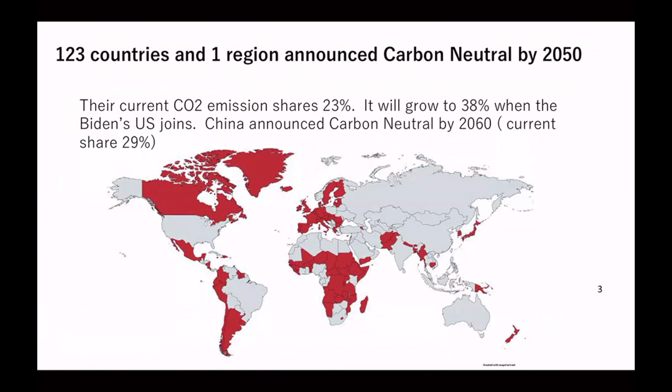One reason is COVID-19 accelerated the transformation. There are 123 more countries now announcing carbon neutrality by 2050. And renewables are getting very cheap, especially solar and wind, and they are the new king of electricity.

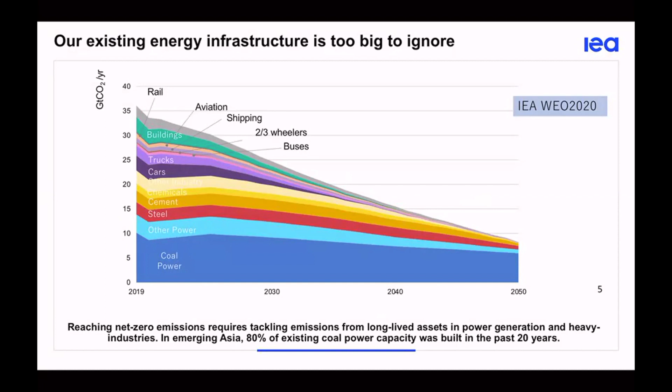But the problem is not solved by renewables alone. The existing energy infrastructure is too big to ignore - coal, steel, cement, and heavy trucks - and many of them take a long time to deplete. The issue is for emerging Asia: developing economies need this infrastructure for economic growth. How to decarbonize these very hard to abate sectors?

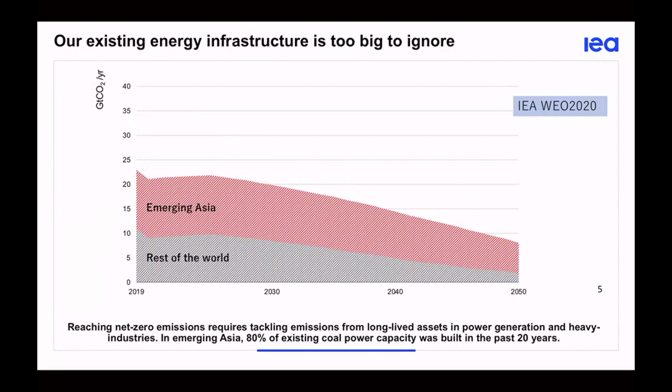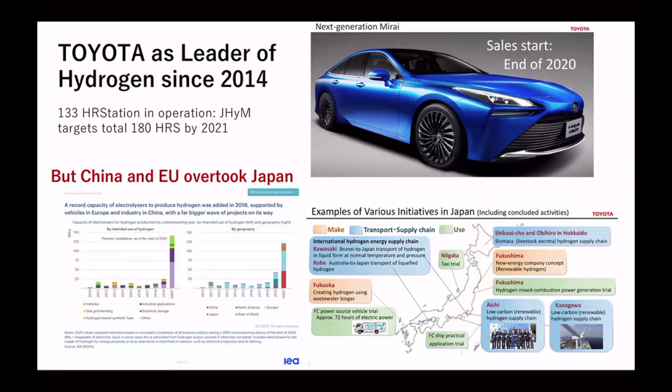Japan started with fuel cell motor vehicles like the Mirai since 2014, but we focused too much on mobility, and China and the EU overtook us. After Prime Minister Suga's announcement of carbon neutrality last year, Japan has been changing very dramatically toward that direction, and METI announced a green growth strategy, and hydrogen is everywhere.

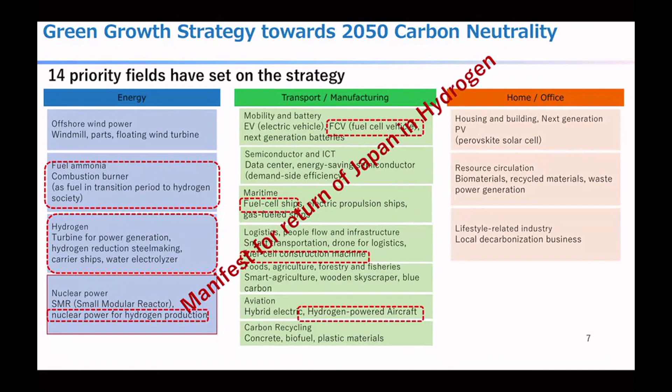Small modular reactors, but also nuclear, can be used to generate hydrogen. I think this is a manifesto for Japan returning to hydrogen leadership. Trading hydrogen is another important element - Japan started LNG, liquid natural gas, trading 50 years ago, but now we must move toward trading hydrogen, either as ammonia, liquefied hydrogen, or organic hydrate.

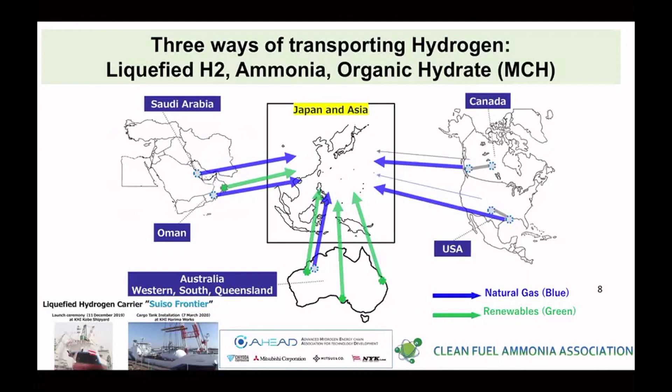ICEF, created in 2014 by former Prime Minister Abe, is an international forum for promoting innovation for sustainability. IEA, in its sustainable recovery plan, identified 4 major necessary technologies: hydrogen, batteries, CCUS, and small modular reactors. ICEF cannot agree more, and for nuclear power, the important thing is flexibility.

Jill Engel-Cox came to ICEF and presented a case. After Fukushima, to recover public concern and support for nuclear power, we need passive safety, we need a solution for high-level waste, and easy collaboration with renewables in a very much decentralized manner.

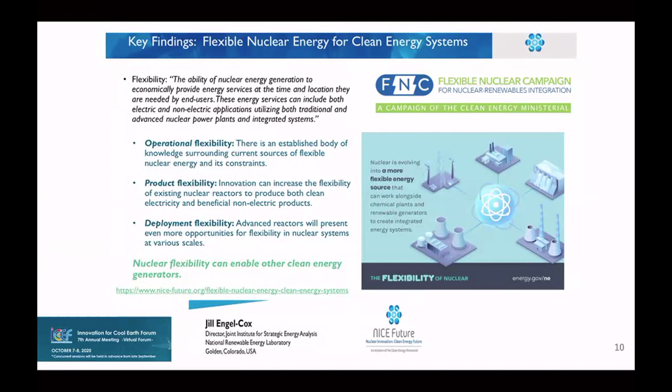Last but not least, an important issue is gender balance. I think women are much more friendly to the environment, and companies with heavier women's board representation have better decisions and performance on climate change. So the final message from ICEF last year was that there are important technologies like battery, hydrogen, SMR, CCUS, carbon recycling, but the major players should be women to reach beyond zero emission reduction toward 2050.

Thank you for my opportunity to make a presentation about ICEF.

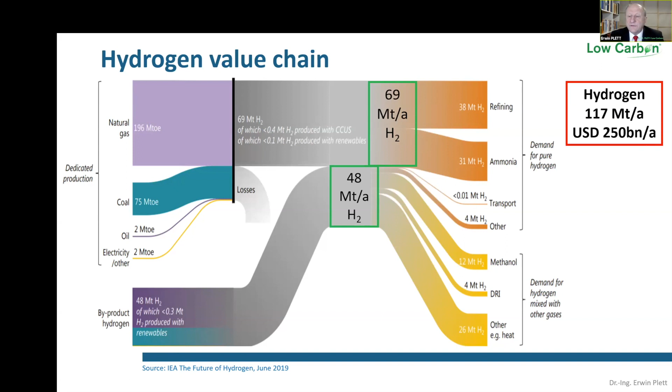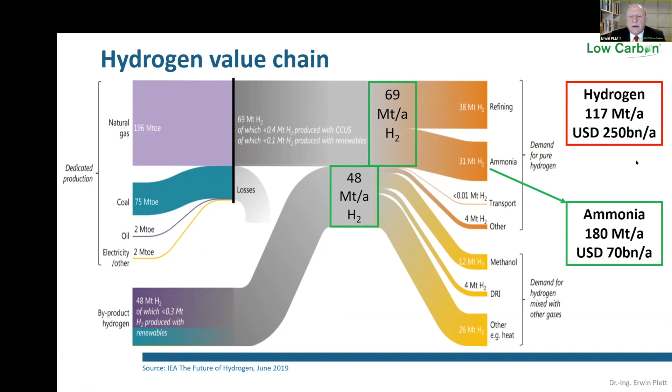One part of this hydrogen is used to produce ammonia, and that is a key element for decarbonizing, for instance, shipping. We take about 31 million tons of hydrogen and produce about 180 million tons of ammonia - that's about 500,000 a day, just to have an order of magnitude.

What about the prices in hydrogen? I borrowed this from BloombergNEF, and you see that depending on our gray hydrogen that we're producing, we could have carbon capture, and those are about 50 or 60 cents on top of the price. Now, what we want to do in Chile - we do have the resources to have very cheap hydrogen, and we are aiming for $1.50 a kilogram. That is our aim, because we do have the natural resources for that.

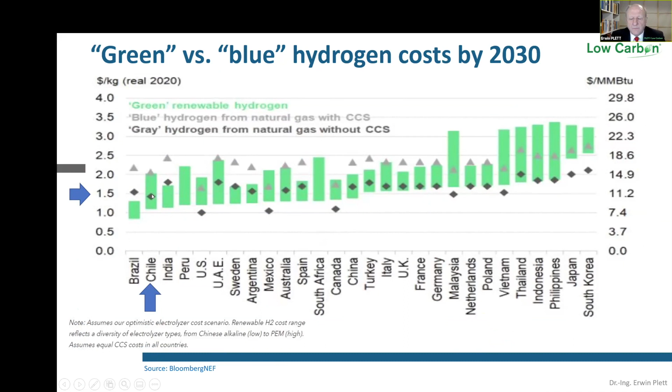Chile is blessed by a lot of sun. Just to remind the audience, our sun, which is a nuclear fusion reactor 150 million kilometers away, gives us about 10,000 times the energy we need in the whole world, for free. So we have a lot of sun, and wind, which is also a consequence of that.

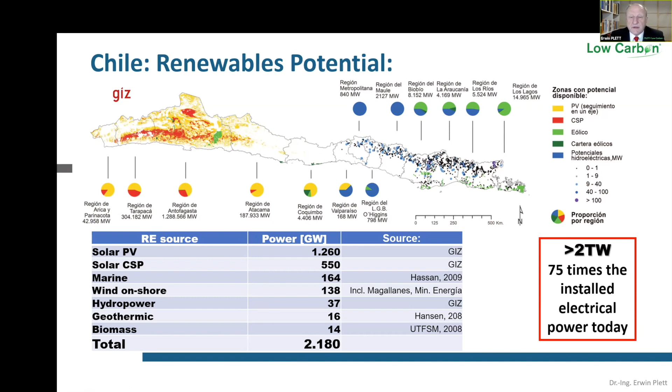So how much can we harvest? In Chile, we have solar PV and solar concentration plants, and our potential in renewables is about 2 terawatts. That's a lot. Just to remind you, the whole world uses about 16 terawatts of constant power. So this is 75 times the installed electric capacity in Chile. We have a lot to share with the world.

In 2017, there was a nice article from the Washington Post. They were battling against a former American president who said he had the cleanest coal in the world, and said, look what Chile is doing. They said Chile could be the next solar Saudi Arabia.

We did two publications, one with Hans Kulenkampff and one in Fertilizer Focus, comparing what is coming out of Saudi Arabia today, average 2.7 billion barrels of crude. If we just burn that, we get 16 exajoules. By the way, all the energy the world needs is 500 exajoules. If we convert that to electricity, we keep about a third. So this is the amount of electricity Saudi Arabia is exporting.

If I compare that potential, the 2 terawatts, with the plant factor, which differs for different technologies, we get about 6 petawatt hours. Converted to hydrogen with today's technology, that's 200 million tons - about 3 times the hydrogen produced today in the whole world. If we burn that hydrogen, we get 22 exajoules, so we're in the order of magnitude of Saudi Arabia.

But if we make electricity with today's fuel cells, at 55% efficiency, we will double the amount of electricity coming out of Saudi Arabia. If we convert this to ammonia, we could produce about 1,100 million tons. Just to remind you, today we produce 180 million tons worldwide. So this is six-fold the amount of ammonia coming out of all plants in the world.

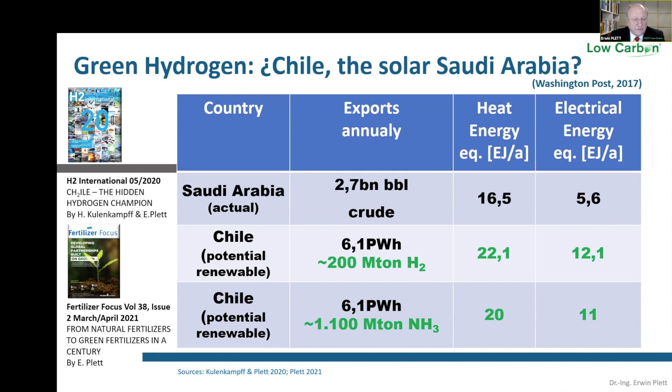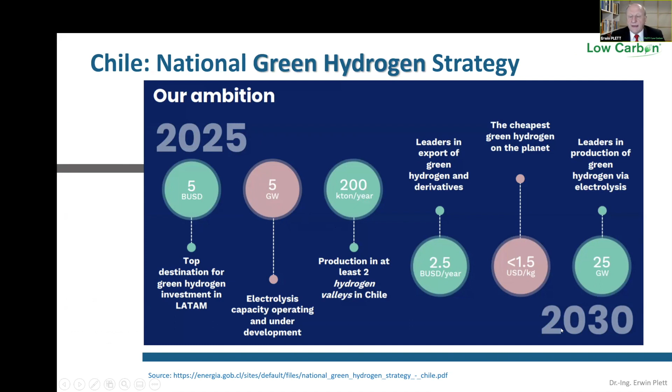In the National Green Hydrogen Strategy, our ambition is to have 5 gigawatts installed in 5 years, and in 10 years we want to go to 25 gigawatts. This is quite a lot. We want to be the cheapest hydrogen on the planet just by using our solar resources.

I would like, in this short presentation, to just thank you for visiting us. We are very proud to have you here discussing this decarbonization of these hard-to-abate sectors. Thank you very much, Dr. Plett.

That was great. It's great to see that Chile is blessed with such remarkable abundance of solar and wind. And obviously there are many countries who don't have these, so what are the other alternatives out there? On that note, I would like to introduce Seth Grae. Seth is the president and CEO of the Lightbridge Corporation. Seth, the floor is yours.

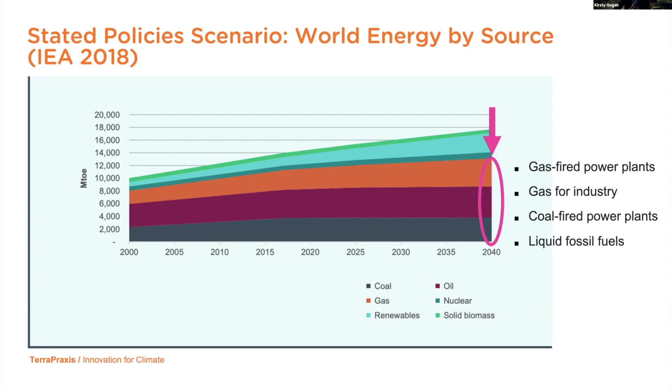And what we're really looking at here actually is a 3 to 4 degree warming trajectory, really far from the 1.5 to 2 degree Paris goals. So if we are to achieve those 1.5 to 2 degree Paris goals, this chart really illustrates just how much we have to do: a very steep emissions reduction curve to mid-century within incredibly challenging timescales, 29 years to 2050.

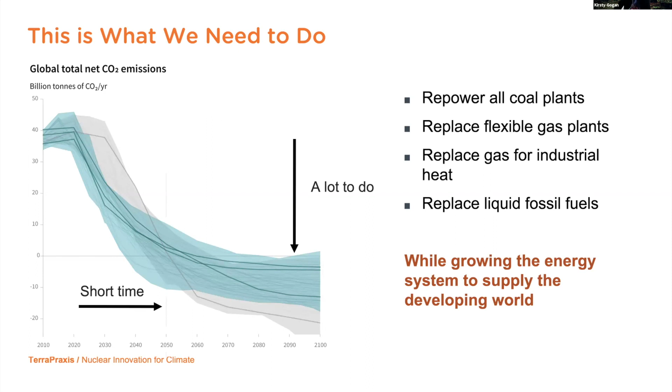And then beyond that, we need hundreds of gigawatts more energy production in order to extract carbon from the atmosphere in the second half of this century, all whilst growing the energy system to supply the developing world.

So given this challenging scale and timescales, our hypothesis is that we need drop-in substitutes that are really comparable in terms of cost and performance to replace fossil fuels, that enable us to repurpose as much as possible our existing storage, transport, and end-use infrastructure without emissions, whilst also leveraging existing skills and supply chain to achieve this cost and scale of the transition that is needed.

So just like an Impossible Burger, in fact, which is a highly scalable plant-based meat substitute that doesn't depend on behavior change, nor on people being willing to pay more.

So let's look at some impossible burgers for decarbonizing the hard-to-abate sectors, and in particular looking at liquid fuels. So drop-in substitutes like ammonia or synthetic hydrocarbons should be comparable, first of all, to the oil prices that we're used to paying today. And hydrogen is a really key ingredient in the production of those synthetic fuels.

So the clean hydrogen also needs to be really, really cheap. In fact, less than $1.50 for ammonia production and less than $1 for synthetic hydrocarbons if we're to be within the range of oil prices that we're used to paying today.

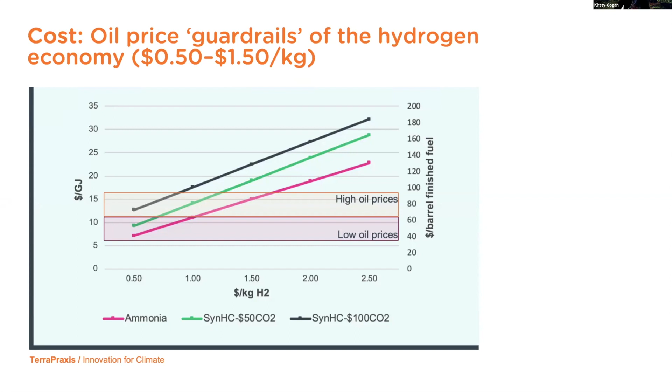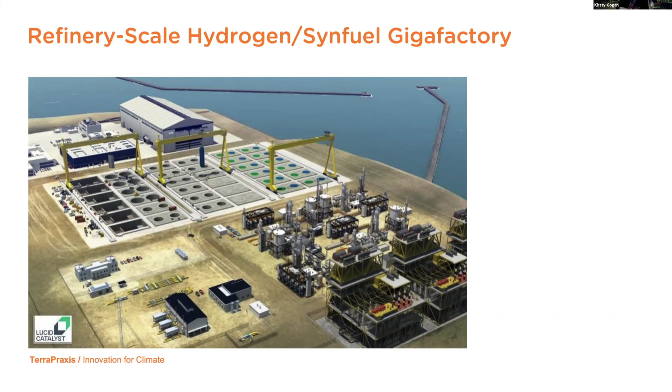Now, it's possible to achieve these really low costs with high temperature heat sources delivered in a refinery scale hydrogen and synthetic fuels gigafactory, like you see here today. This is a fully integrated installation, manufacturing and production facility, hosting 36 high temperature heat sources manufactured in the grey sheds at the back of the facility, installed and producing hydrogen for less than $1 a kilogram.

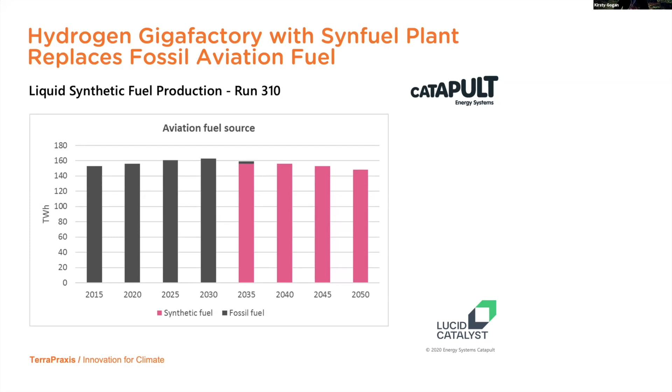We modeled the hydrogen gigafactory into the UK's Energy Systems Catapult energy system model. You can see here the effect when you can supply carbon neutral synthetic fuels at the same price, or potentially even lower than the fossil fuel version today - a really rapid switch.

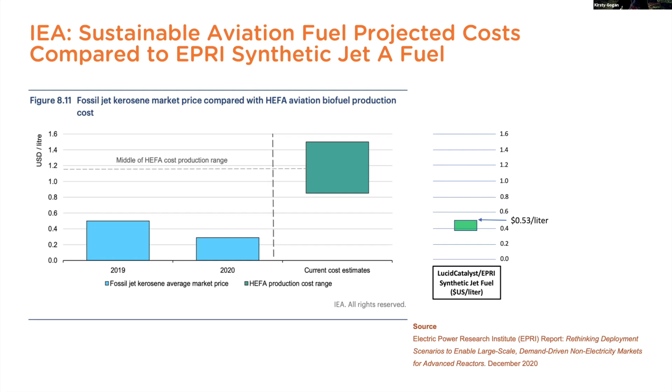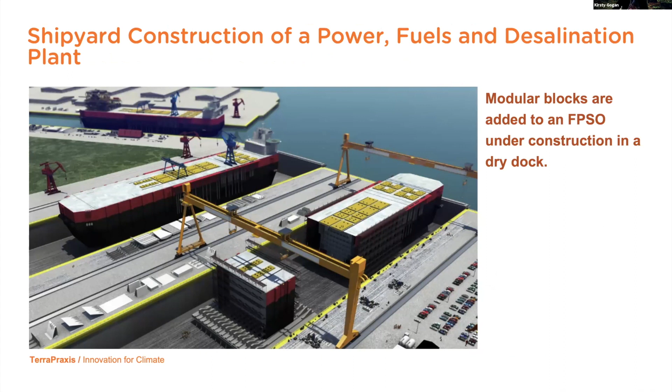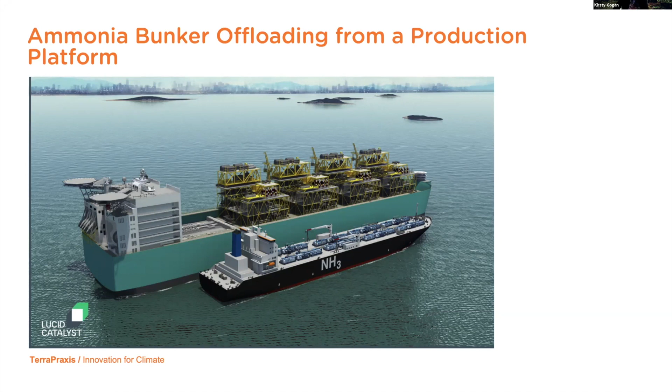In fact, world-class shipyards already work very closely with the oil and gas sectors to produce large offshore production facilities, such as you can see here, in this case using high temperature heat sources to produce hydrogen and ammonia for the shipping industry. So this is really leveraging world-class existing shipyard manufacturing capability, as well as oil and gas production, storage, distribution, and end-use infrastructure without emissions.

This is a multi-product platform envisaged to be moored off the coast of a developing country, maybe like Ghana, for example, making hydrogen, power, ammonia for diesel engines and combined cycle gas turbines, whilst also using the waste heat to desalinate enough water for the entire city region of Accra. Really an incredible multi-product infrastructure project, without requiring all of those terrestrial projects to be built on land.

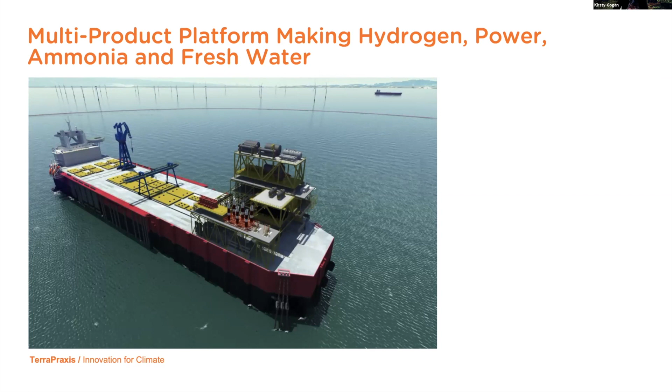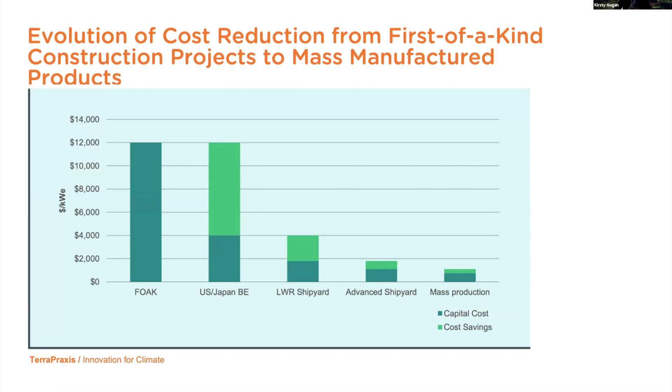So the evolution of costs that we're used to seeing from recent first-of-a-kind, first-in-a-generation nuclear construction projects in the United States and Europe - cost reduction is achievable firstly by moving to a programmatic approach, such as we've seen previously in the US and in Japan, shown in light green, and then ultimately away from project-based approaches to product-based high manufacturing and mass production environments, such as those examples I just showed you.

And the result is that we should be able to substitute the planned flow of oil and gas over the next 3 decades for a smaller investment, just $18 trillion, than the oil and gas industry intends to spend anyway in order to maintain the flow of oil and gas - approximately $24 trillion is forecast to be spent. As my 9-year-old put it: you mean it would be cheaper to save the world than to destroy it?

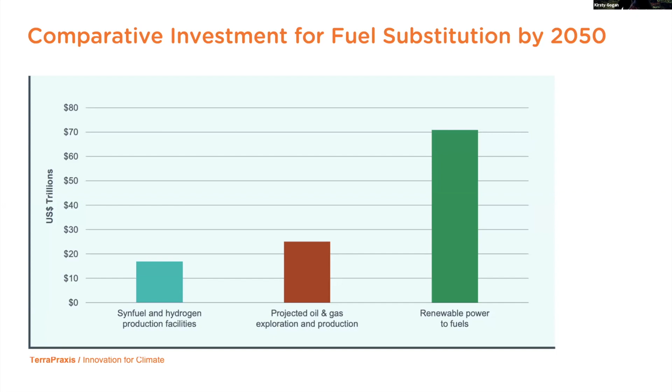This really demonstrates that this approach need not compete with our existing renewables deployment strategies for the decarbonization of electricity, but that actually we could really integrate our strategies between nuclear and renewables and achieve our goal, which is net zero by 2050. Thank you so much.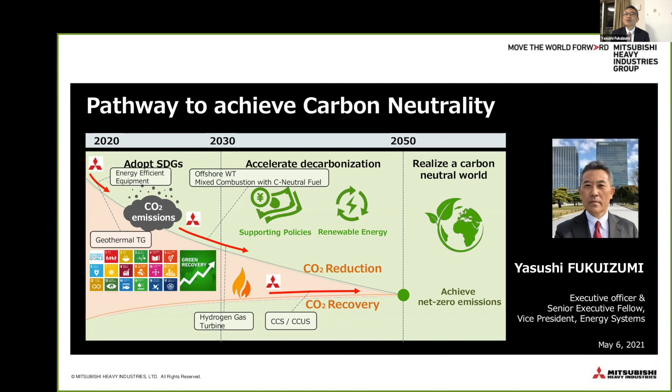I did not include nuclear technology here, but nuclear topics in Japan are a little bit sensitive, so we didn't include that. But we are seriously working on nuclear technology, conventional as well as advanced nuclear systems like high temperature gas reactors and so on. Okay, next page please.

Our discussion of green hydrogen or blue hydrogen, green ammonia, blue ammonia started initially from the viewpoint of power generation, where renewable energy is sometimes very surplus with a negative price. So why don't we utilize that renewable energy for storing energy and making clean generation?

However, there will be increasing CO2 emissions in industry. Because we've been involved ourselves in that industry business, supplying machineries to them, we came to know the importance of CO2 emission reduction there. At the same time, carbon neutral fuel investments are a little bit difficult to recover by power generation alone. That's why we are currently focusing on that.

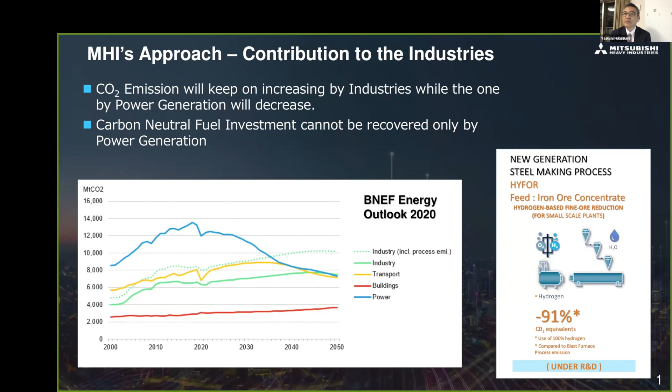For that purpose, we are investing ourselves in a venture company in South Australia, where renewable energy resources are quite rich. There we are making green hydrogen as well as green ammonia.

The hydrogen will be used not only for power generation, but also for local industry, contributing to chemical industry, fertilizer industry, and shipping fuel as well. The site is just adjacent to the local steel making company.

As such, we are trying to also develop the consumption side of green ammonia or green hydrogen, as we see that the initial takeoff of these green carbon neutral fuels might probably be starting from the industry side as well.

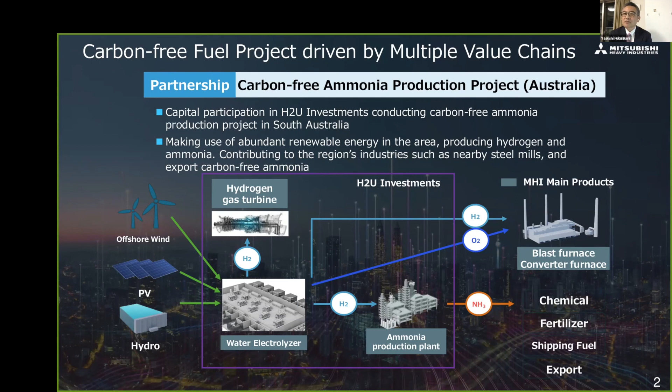Next page, please. As one of our activities, we are participating as a foundation partner to the AP Moller Maersk established institute, called the Zero Carbon Shipping Institute. This is led by AP Moller Maersk, who is the market leader for the ocean freight company. They are seeking carbon neutrality finally achieved in 2050 for the shipping industry.

We are working on the upstream fuel development side, as well as the onboard equipment and innovation side. For that purpose, AP Moller Maersk is inviting many strategic partners, including us, as well as stakeholders across the various supply chains, the whole supply chain of green fuel.

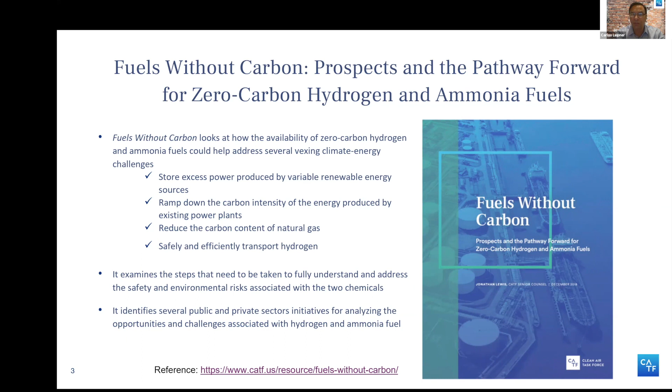So why consider nuclear technology to produce zero carbon fuels? First, we can see that existing nuclear reactors today operate with great performance, typically with capacity factors above 90%. They're very reliable. They have an established, proven operating experience. They are clean as they don't emit CO2 as part of their operations. They also can offer flexible pathways to produce hydrogen, which then can be used for many purposes.

Hydrogen can be produced from nuclear power via low or high temperature electrolysis, as well as via a thermochemical process. Today, there are already several nuclear hydrogen programs being developed. In the United States, for example, there are demonstrations with 1 to 2 megawatt electrolyzers planned at existing LWRs for low temperature electrolysis prototypes. In France, EDF is planning hydrogen production with its nuclear fleet. Even in Brazil, Eletronuclear is already producing hydrogen as a byproduct from a local chemical process and is considering a project to capture the hydrogen and use it for various applications.

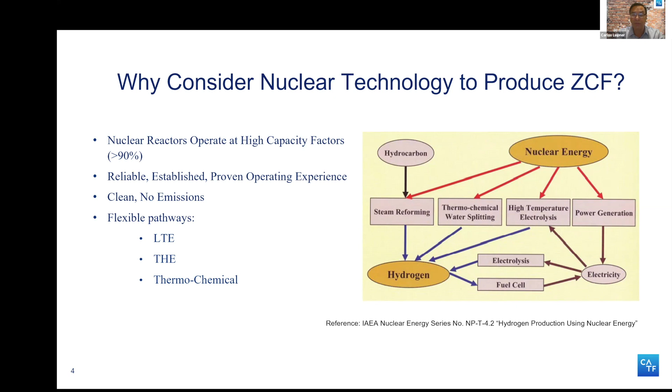So the development is real. But with new nuclear technology, the advanced reactors are changing paradigms. New reactor designs, including many small modular reactors (SMRs), high temperature gas reactors, molten salt, or other high temperature designs like heat pipes, are being developed, and a few are about to be deployed this decade. These advanced designs offer multiple applications, not just for power generation, but also for non-electric applications such as desalination, hydrogen production, process heat, and others.

These advanced designs offer many favorable features. First, using an advanced manufacturing approach, as mentioned by Rita and Kirsty, a shipyard model will dramatically reduce cost, reduce construction time, and increase quality. These have improved safety, inherent safety — they can be walk-away safe type of designs. And they're modular and scalable in size and deployment, which translates into reduced CapEx and OpEx.

Clean Air Task Force is leading a nuclear hydrogen initiative with several working groups focusing on policy, technology and licensing, markets and partnerships, and financing, in order to craft actions and recommendations to move forward in a meaningful way in these initiatives.

In closing, we are all challenged by the climate change impacts and the aggressive mitigating goals that are ahead of us. Achieving zero by 2050 is not an easy task, and we believe that we need to look at and use all the available options at our disposal. Decarbonizing the energy matrix is hard, and even harder in certain sectors like transportation and shipping, as we are discussing. A transition to zero carbon fuels is key, and both hydrogen and ammonia will be essential to enable this change. Nuclear energy and advanced reactors will also play an important role in this journey due to their high energy density, reliable performance, scalability, and zero carbon emissions characteristics.

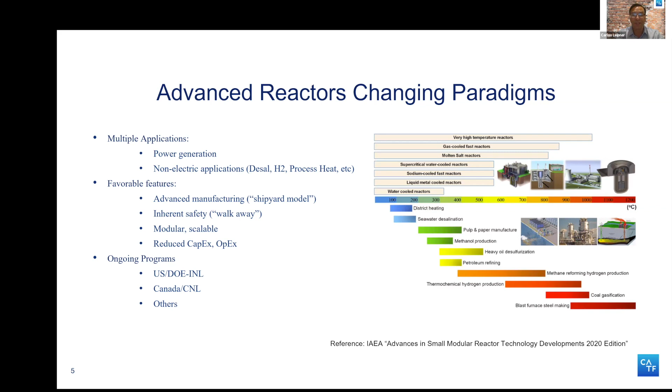It's a tool in our energy toolbox that should not be spared. Once again, thank you for the opportunity to share these perspectives.

Carlos, thank you very much. I think the message could not have been clearer that all hands are on deck when it comes to all the available technologies to reach those rather important goals by 2050.

I would like to now introduce Eri Nakatani. Nakatani-san is the Deputy Director of Nuclear Energy Policy at METI. Nakatani-san, the floor is yours.

Thank you, thank you very much. My name is Eri Nakatani at the Ministry of Economy, Trade and Industry of Japan. Very nice to meet you.

We believe nuclear innovation can contribute to decarbonizing the world in many aspects. Of course, we as the government of Japan put safety first when we think about nuclear, because of all the lessons learned from the TEPCO Fukushima Daiichi accident. But it can also address issues related to the renewable energy age, such as flexibility and multipurpose use. It may also contribute to higher economic efficiency, as well as addressing nuclear-specific issues such as non-proliferation and radioactive waste. As Tanaka-san noted, the government of Japan published the Green Growth Strategy at the end of last year, and it highlights...

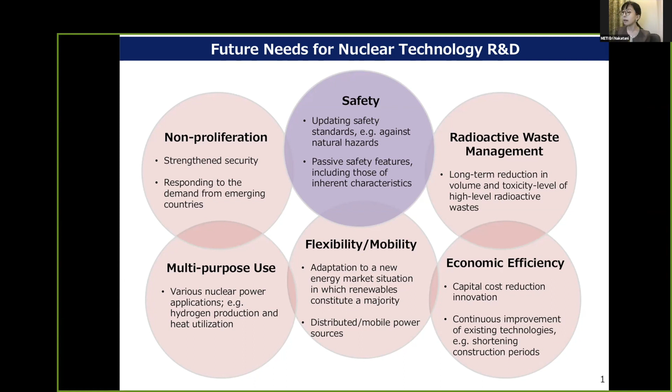So the government of Japan published the Green Growth Strategy at the end of last year, and it highlights nuclear as well as hydrogen.

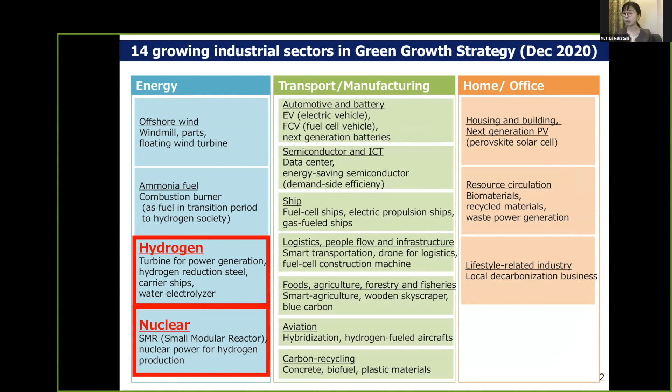Among nuclear innovation technologies, I would like to especially highlight the high temperature gas-cooled reactor and the fusion reactor for this event. Both have great potential to efficiently utilize high temperature heat, which is necessary for decarbonizing hard-to-abate sectors such as steel, chemicals, etc.

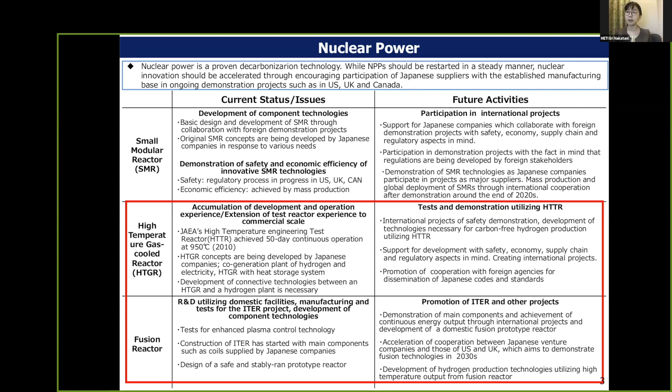My ministry, the Ministry of Economy, Trade and Industry of Japan, as well as the Ministry of Science, together with national lab JAEA, have been promoting a nuclear innovation program called NEXIP. Our national lab, JAEA, can provide R&D facilities and resources, and together with these stakeholders, we are supporting several feasibility studies by private companies. We believe innovation programs such as this are not only the best innovation policy, but also the best human resources development policy.

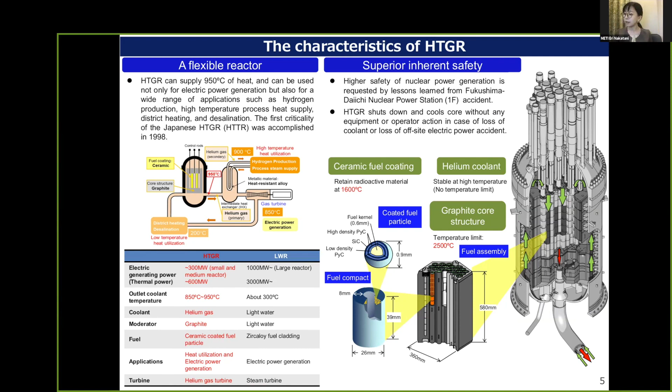This slide shows the example of HTGR. The high temperature gas-cooled reactor can provide flexible power utilizing its high temperature heat. When the grid does not need electricity, such as when the sun is shining and wind is blowing enough, we can utilize the heat to produce hydrogen, which is another form of energy storage. And it has a superior inherent safety nature, since HTGR shuts down and cools down without any equipment or operator action.

Japan already has an experimental HTGR called HTTR, and it has a historical record of achieving 50 days of continuous operation at 950 degrees Celsius, which is the first in the world.

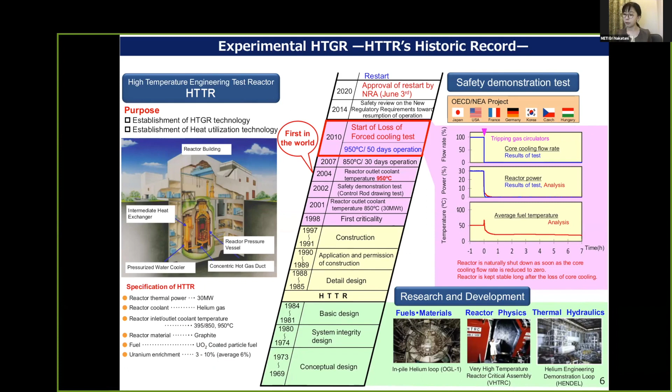In the NEXIP program, our ministry is supporting two feasibility studies of HTGR. One is done by Mitsubishi Heavy Industry, a hydrogen and electricity cogeneration HTGR. The other is conducted by Toshiba ESS and Fuji Electric, working on a heat storage HTGR coupled with a molten salt heat storage system. And we are also supporting a nuclear fusion company called Kyoto Fusioneering. Since nuclear fusion needs components which can withstand high temperature, we believe the Japanese industrial base can contribute to the world, especially when many venture companies in the West are working on nuclear fusion reactors.

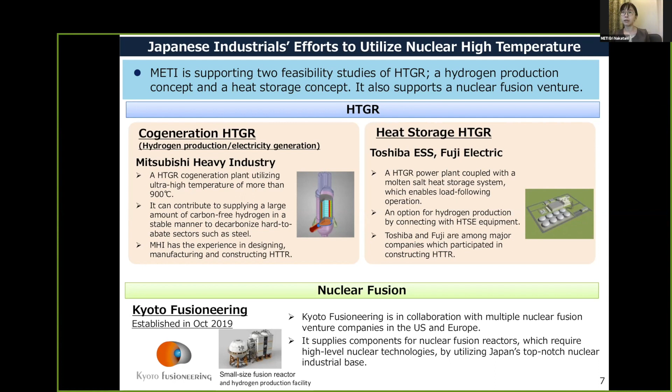So thank you very much for your attention. We hope Japan can contribute to decarbonization utilizing nuclear heat.

Thank you, Nakatani-san, it was a great presentation. I believe it's been a great round of statements to begin with, and there are some questions I may ask.

Beginning with a quick statement that we need a 100 times scale up in less than 30 years to meet this challenge. We need a very large market to achieve the scale, but we also need to create purchasing mechanisms where every single ammonia project, for example, can achieve the target cost or below, which is contracted to do so. Do we see evidence of any of these coming along at this stage? So I open the floor, please, anybody who would like to pick that up.

I think to date, the climate and energy discourse has been, understandably, largely focused on the electricity sector. And that's important because there's a lot of opportunity there to decarbonize and also to expand electrification into other sectors to support that decarbonization. But as we've heard today, there are a lot of hard-to-abate, unsolved parts of the challenge that do need to be addressed in other ways.

And that, I think, is now becoming more of a priority. We're looking for new production options. Go to Rita and Seth, to start answering your question: what are we seeing today?